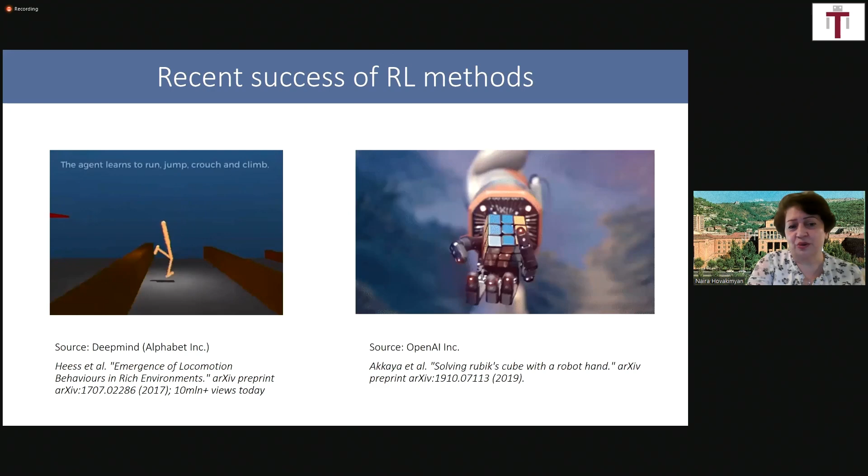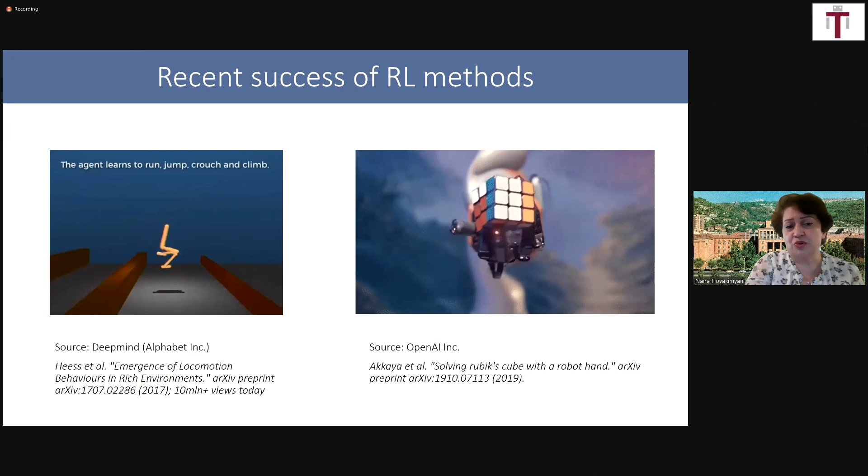Applications of reinforcement learning methods have created great impact across not just our community, but widely across the globe, like the animation on the left from DeepMind. I checked today, it has more than 10 million views. It basically shows how the agent learns to run, jump, climb without having any prior model. It learns from its own mistakes, collects data, fails again, collects data, learns, has a reward function which keeps it moving forward, and so on. On the right, you see the Rubik's cube that I'm sure many of us have played with in our young days. So it can be today reconfigured with a robotic arm.

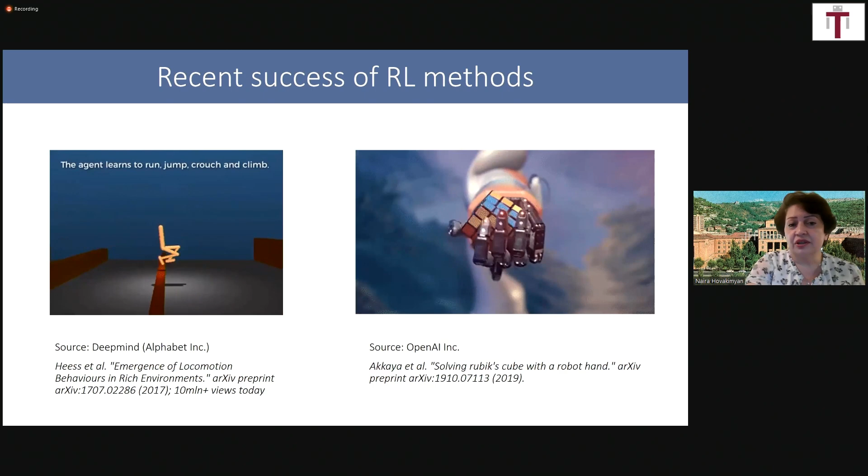While these applications seem very impressive and show what artificial intelligence methods or machine learning methods can achieve from having data and learning methods, obviously we cannot afford having these methods on safety critical systems. Safety critical systems will not forgive mistakes. We cannot allow failing, collecting data, trying, learning, failing. So every crash here can be catastrophic. Human deaths are not allowed. Accidents can be very expensive.

And we have experience here of flying the Learjet. We are not just talking artificially here. The airplane on the left, you will see through this presentation numerous times. The drone here is a picture taken in our lab. On the right, we have the Waymo car. My student is working at the company. So these safety critical applications can punish us severely if we afford playing with them, assuming that we can have a mistake, collect the data, learn on the go.

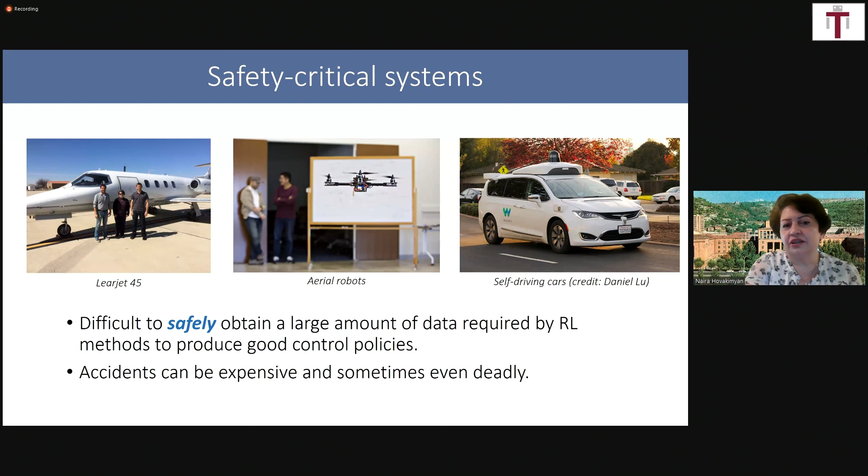So let's look at what's happening in a typical setup when we try to collect the data and use an optimized controller like that. Typically, we have a model learning block that learns the model from the data. There is an optimization that produces a controller, and the controller drives the system. So what can happen is that external disturbances or modeling errors can basically destabilize the system.

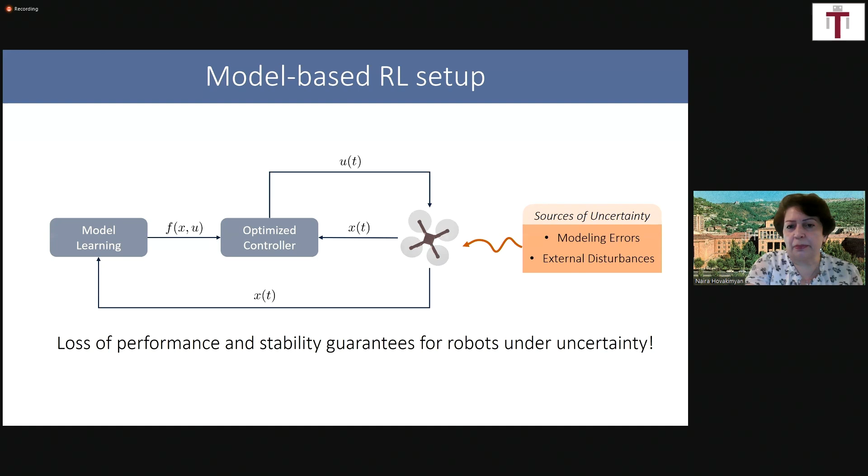What one needs to understand is that safety must be built into the control architecture from the beginning, by design. This means we need an augmentation with a safety controller that ensures the safety of the system throughout the learning process. No matter what mistakes, errors, or data collection issues occur during learning, safety must always be there, so that every new piece of knowledge acquired, subject to errors and failures, will not destabilize the system.

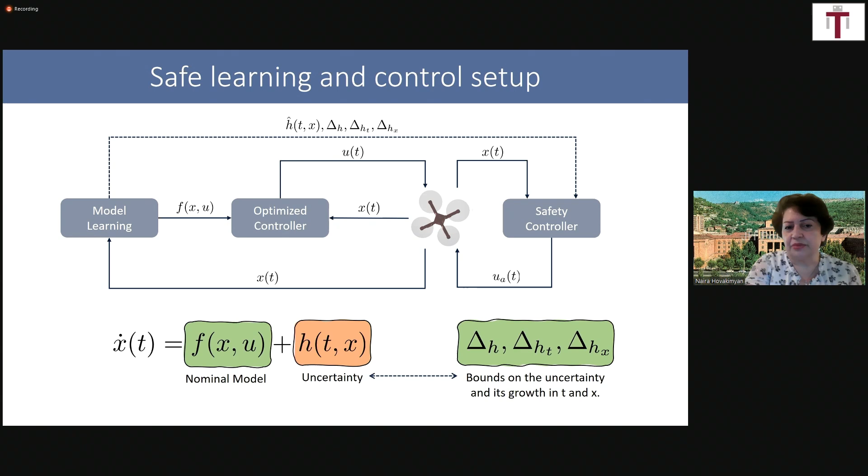Looking through this type of development, what do we need from the safety controller? We need typically certificates of performance and robustness, which include transient performance, steady state performance, time delay margins, and disturbance rejection—something we learn in a junior level control class, like the alphabet of control technology.

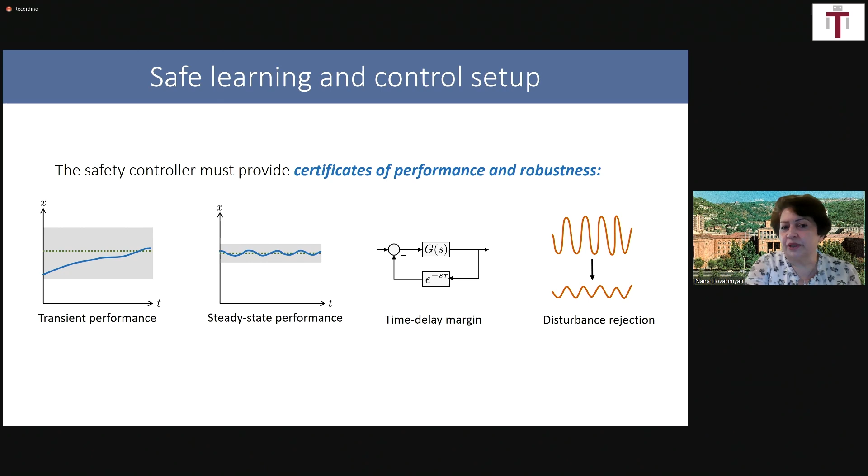The L1 adaptive control architecture that we developed over the last 15 years has proven its worth already on a variety of big platforms. I'll show some flights of the Learjet. We have commercialized it for Evolution autopilots of Raymarine, for some drone technology. It went into hydraulic pumps of Caterpillar. We have tests at Statoil on drone technology of IntelinAir and many other industrial applications.

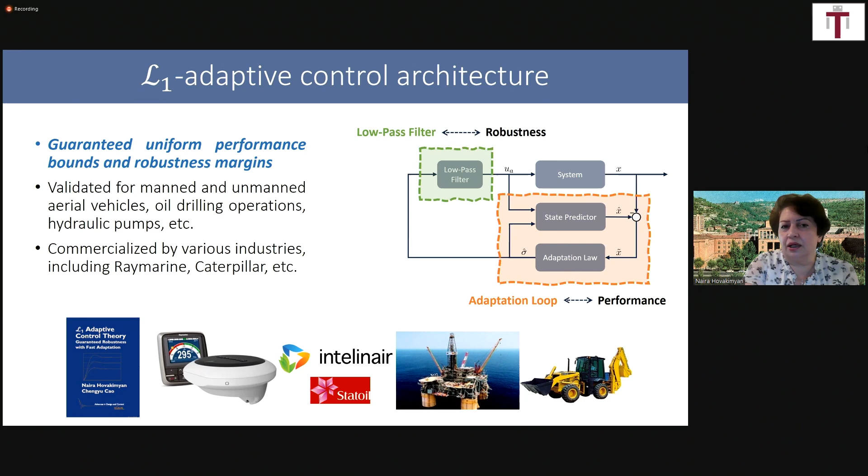It has an architecture in which the estimation loop is decoupled from the control loop, so we are able to tune for performance and robustness in a very systematic way, and be able to quantify its robustness and performance margins and its performance bounds a priori, and be able to remain in hold of those throughout its performance.

So when we augment the L1 adaptive controller with a type of model learning controller that I described, what we are able to do is retain the key features of performance and robustness of L1 adaptive controllers, yet at the same time benefit from the versatility offered by these machine learning methods. This is what we will explore through this presentation, and this is what makes up most of our current research program at Illinois these days.

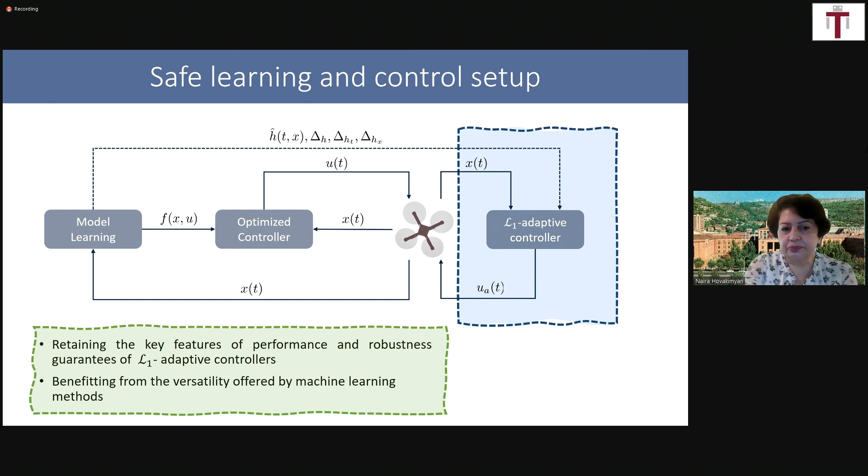L1 adaptive control theory provides decoupling between estimation and control, and helps us establish the type of performance bounds shown here. There is a desired system trajectory that one would like to follow. There is a reference system, which is a hypothetical reference system. It's non-implementable, but it describes the best type of performance one would achieve with L1 adaptive controller if the system uncertainties were known.

Between this reference system and the actual system, the performance can be quantified as inverse proportional to the square root of the adaptation rate, while the performance of this reference system with respect to the desired system can be quantified proportional to the filter bandwidth, augmented with an error that decays exponentially, dependent upon the initialization error.

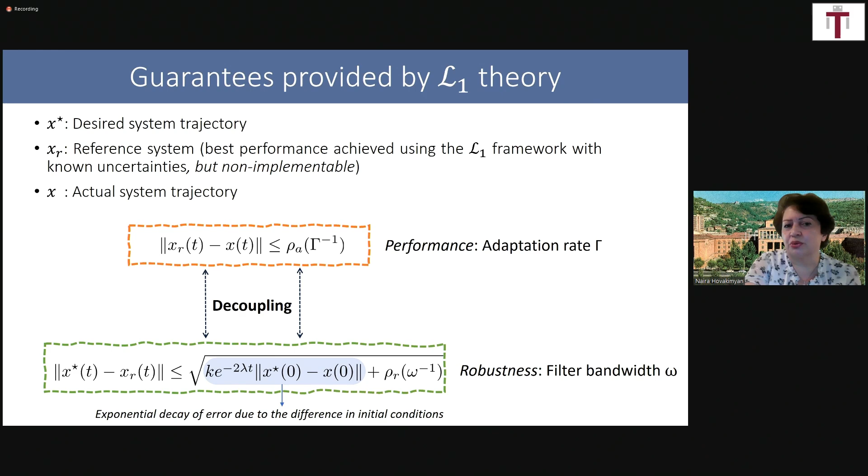With this decoupling, we are able to tune the performance and robustness of the system in a systematic way. It is this architectural versatility of the L1 adaptive controller that helped us achieve quick tuning across different applications in different industries, and to achieve transition to different industrial platforms.

Here is a timeline of how our development went. The first papers appeared back in 2006 at the American Control Conference, and in the same year at the AIAA Guidance Navigation Control Conference. We had our first flight tests with the Naval Postgraduate School on their Rascal UAVs with Piccolo autopilot, doing augmentation of their outer loop to fly aggressive path-following trajectories.

Later in 2007, we got NASA grants to fly their Airstar subscale commercial jet. We were able to successfully put the airplane into stall and post-stall conditions, giving the pilot smooth recovery opportunities. That led to joint publication opportunities with Boeing, Raytheon, and other co-authors, giving lots of visibility and opportunities to write papers with other companies.

That's where we got collaborations with Statoil, Raymarine, Caterpillar, Eurocopter, MBDA, and Seagate. All these companies got attracted to the technology, and there were lots of transition opportunities.

Then we got the opportunity to also test on real airplanes. While NASA was testing it on a 5.5% subscale commercial airplane, the Learjet and F-16 were already real airplanes, with pilots inside, that we were able to fly in 2015, 2016, and 2018. And now, with the explosion of machine learning methods and the robotics industry, we were able to take this framework of safe learning and control and move into robotics applications.

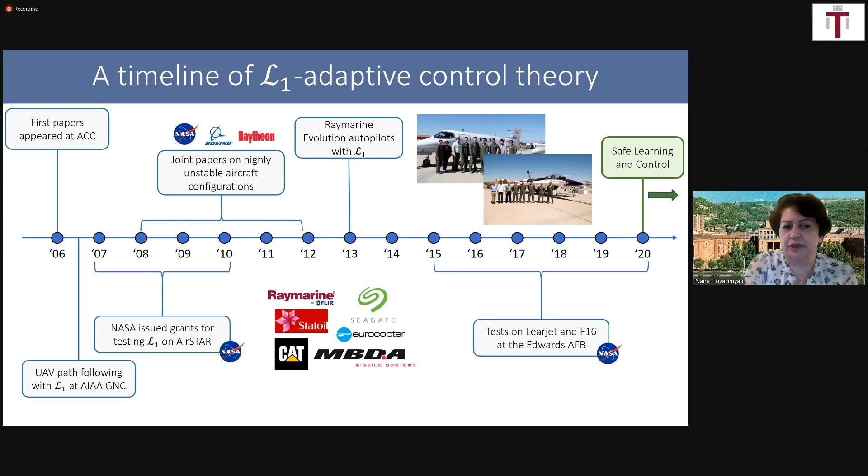Before I go on to show what we do with safe learning and control for robotics, I want to show some of these flight tests of the Learjet, because these are very interesting and will keep everybody entertained somehow. With the Learjet, when we go to fly it, we basically have pilots and flight test engineers.

The Learjet is a CalSpan vehicle with a variable stability system configuration, where they can inject accidental configurations that they design with us carefully to validate the robustness margins we claim theoretically. They're able, with their safety switches, to take over in case our theoretical claims don't get verified, so they can save the aircraft.

That's why they take the risk to fly into these configurations. So in the next movie I'll show, they are going to test for handling qualities, flying qualities. When you fly the airplane in normal configuration with no fasten seatbelt sign, that's flying qualities level 1. When you have turbulence and the fasten seatbelt sign, that's already degradation, flying qualities level 2, and so on.

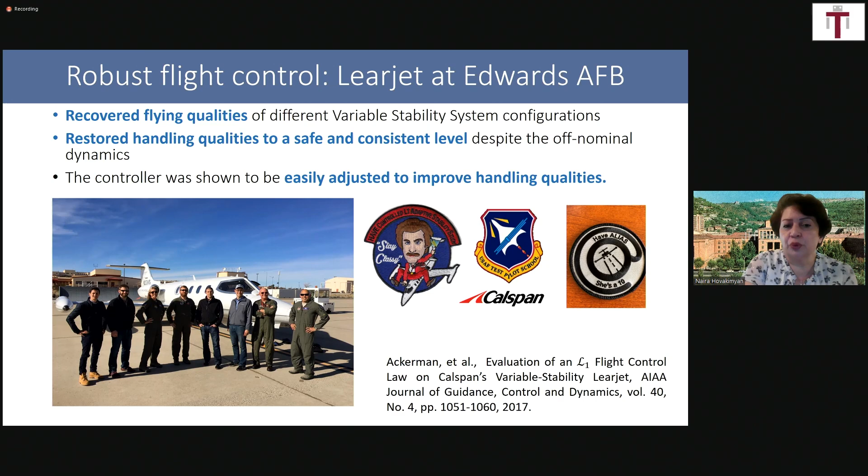The pilots are put into a configuration when it's very shaky, and they have the Cooper-Harper rating scale in their hands, where they have to read and assess whether it's flying qualities level 1, 2, or 3, and from which configuration, how much they recover. Because the situation is very shaky, they're not able to read from the piece of paper, so they ask for L1 to come on so the airplane can be stabilized and they can read in which configuration they are and how much they recover.

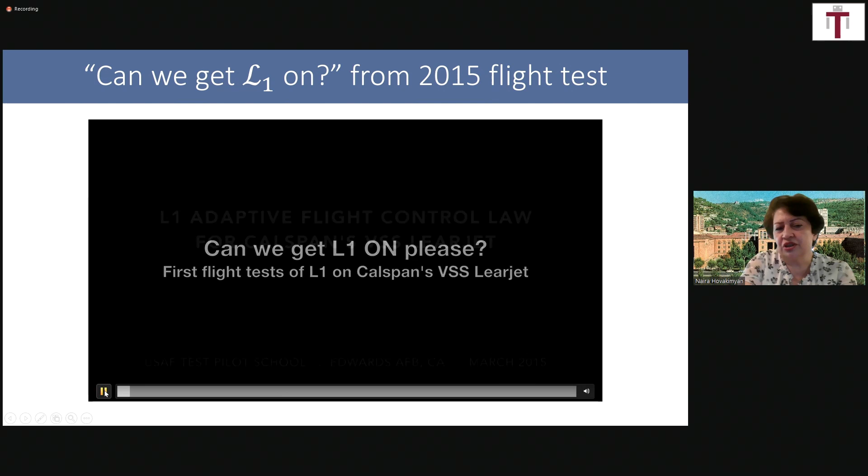So just listen. I gave a little preview so that when you listen, you manage to catch up, because it goes pretty fast. It's shaky, it's accidental, so it goes a bit fast. That's why I gave the preview.

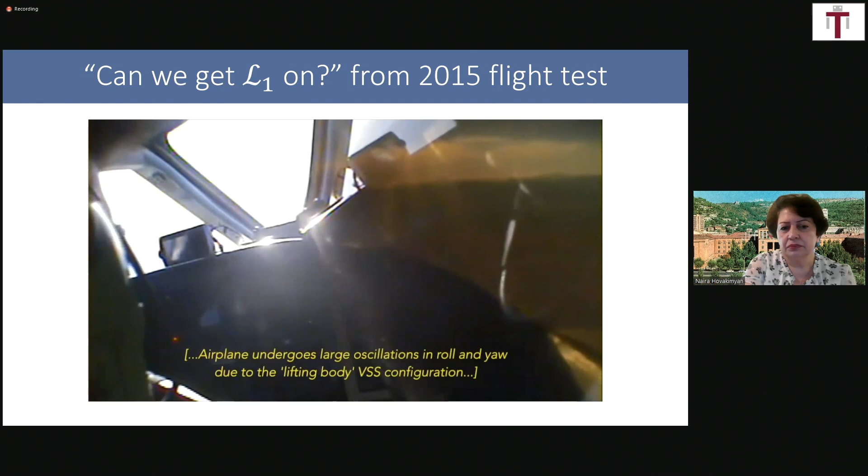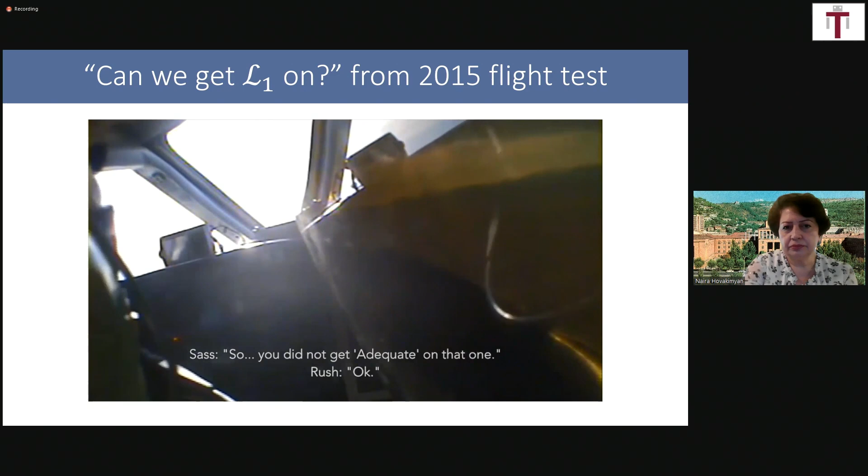Constantly overshooting my desired bank, though. Jason's probably hating life right now. Yep, you're right around 27. I'd recommend you just do the task with L1 on and don't do both tracks. Got it, all right, so you did not get adequate on that one? Okay, so if you want to run through a CHR real quick, you did not get adequate. So we're starting in... can I get L1 on as we do the scoring, please? Yep, there's your answer, there's your answer, right? All right, L1's coming on in 3, 2, 1. Now L1 is on, thank you. Rush, if you didn't ask, I was gonna.

And now it's a landing scenario, basically. Landing is very challenging. For example, NASA never decided to land with L1, but with Learjet, they agreed to land with, again, some type of abnormal condition.

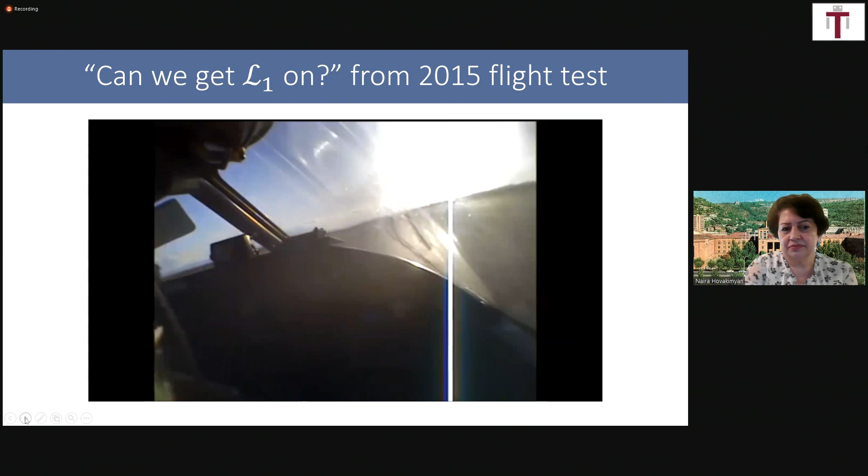200 feet, copy. 100 feet. 50 feet, shallow, looking good. There's a ground effect, you see that? Yep. It's uneventful to me, very uneventful.

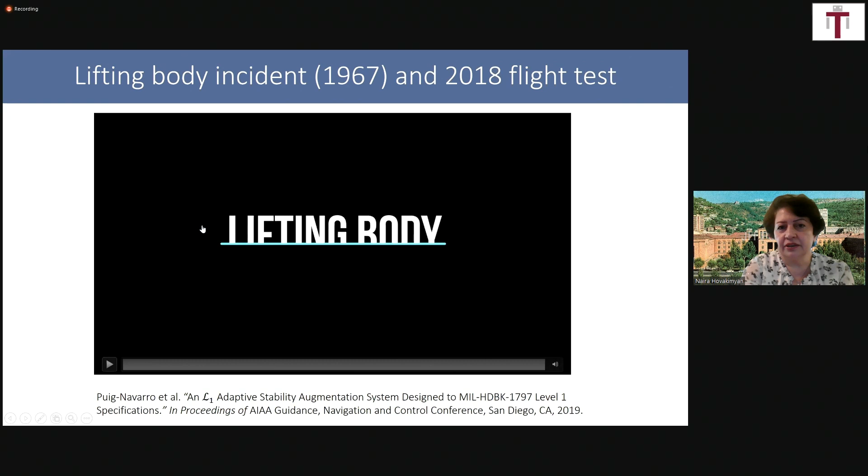So this was the 2015 deployment, upon which in 2016 we got the F-16, which we unfortunately cannot show and talk about because that's F-16. In 2018 we got the Learjet again, and here they implemented an accident from 1967, which is a lifting body incident when the aircraft goes into a roll spiral mode configuration.

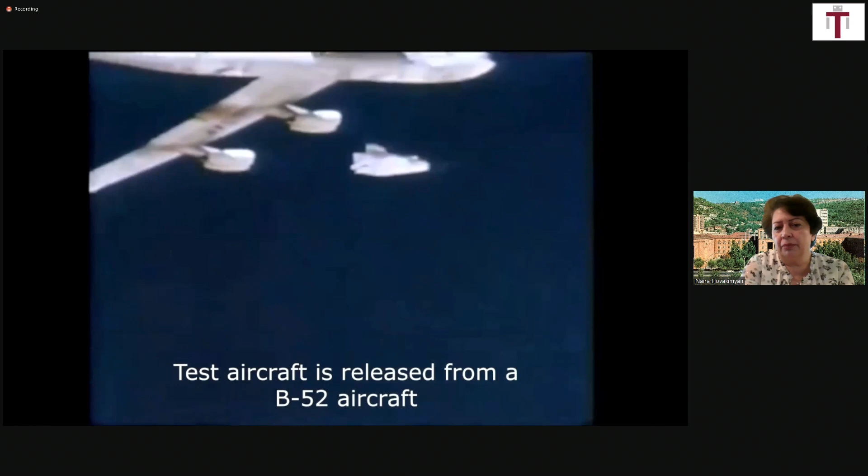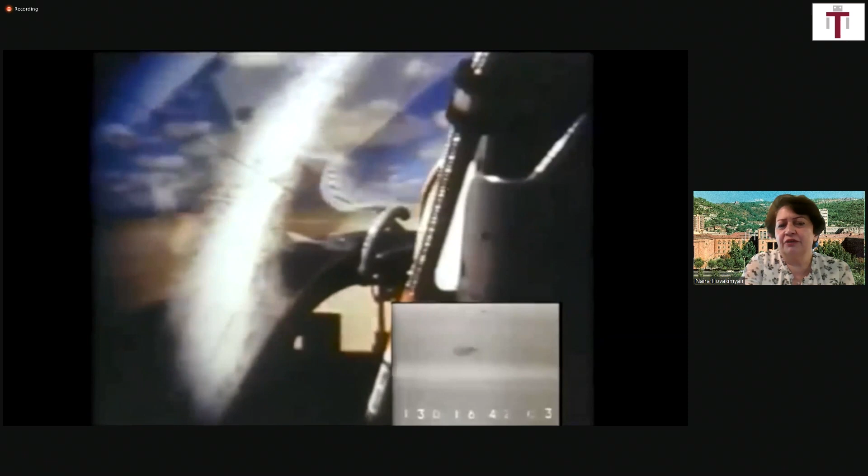In this 1967 accident, luckily the pilot survived. They have the test data from this accident, which they are able to inject into the Learjet and test it. These tests are extremely valuable and precious in some sense for training the pilots and students. This experience is extremely invaluable for everybody involved in this process. Now just listen to the recordings.

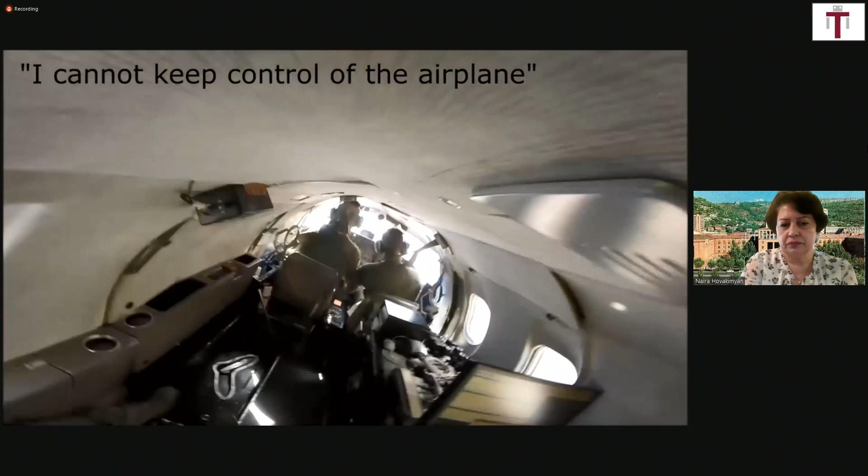I cannot keep control of the airplane. You have the airplane? The student on the left is my student, sitting there, Javier.

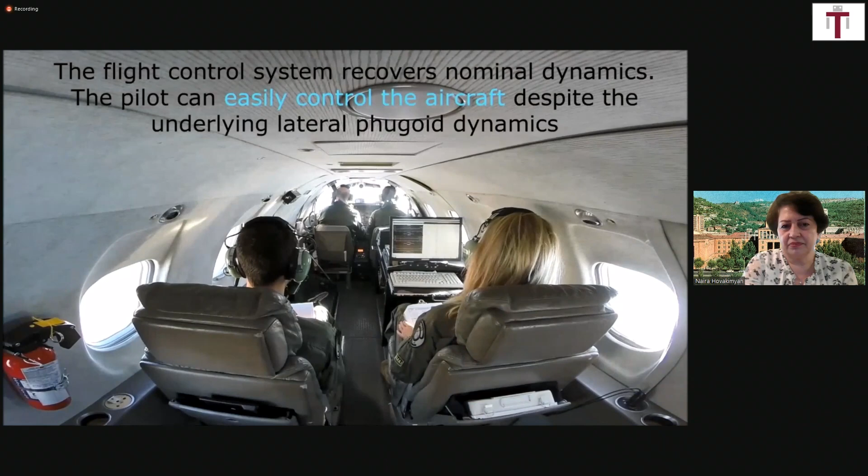Hey, task in 3, 2, 1, now. So you can feel there, in high frequency, I made some high frequency inputs, excited the roll. Lower frequency, the roll overshoot or oscillation tendency is less. Sounds good, there's still some there. Pitch, I'm having no issues. Fine tracking and gross tracking are very good in pitch. All right, and I have maneuver complete.

Now they go into engine out test.

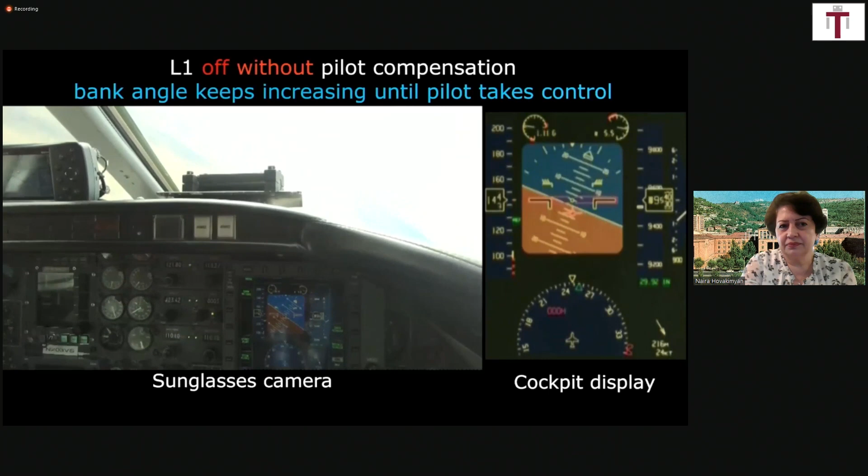All right, recording on in ready, hack. Running, okay, power's coming back. My hands are free, 3, 2, 1, now. Controls fixed, and recover please. Okay, and recovering. Power's back.

I'm ready to try this now with a pilot correcting for it. Okay, I'll give it about 1 second of reaction time. I am on conditions. All right, and then recording on my call. Ready, hack. On. Okay, power, it'll be left throttle. In 3, 2, 1, now. 1 potato and recovering. And recording off, okay, recording off, matching throttles.

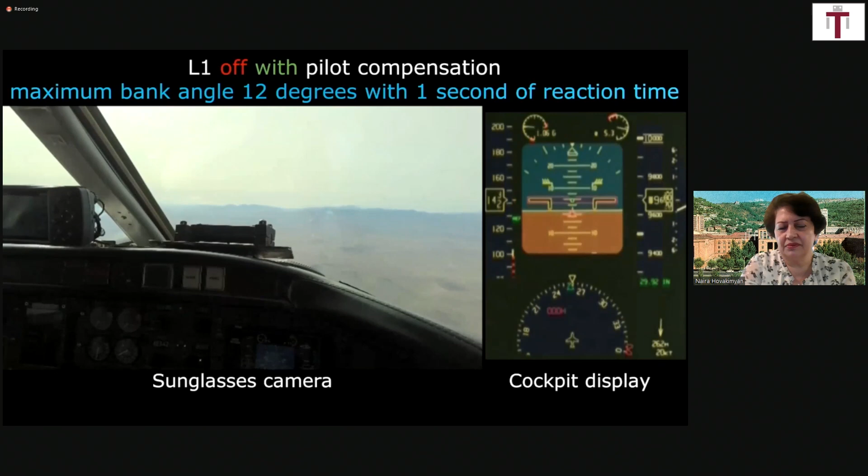And with L1, they come to 3-degree degradation only.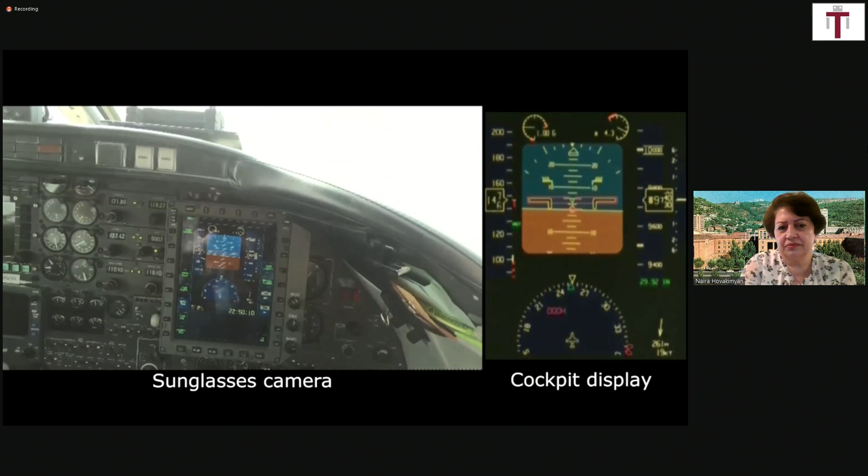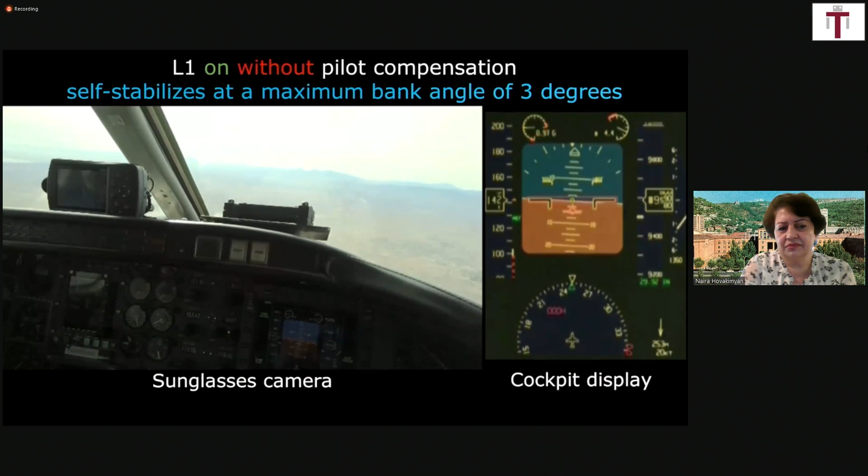I'm not touching the controls. Nice demonstration, check that out. About 3 degrees of left bank. Speeding in the rudder to match. I can feel that, it is descending a little bit, but that would be easy to compensate for. I think you got some good data there. All right, recording off, matching power, recording's coming off.

So this is what I tell the students, that in real world, there is no zero, right? 3 degrees, pretty good. After what we saw with 20 degrees without pilot, with pilot it was 12 degrees. With L1 without any pilot, it was 3 degrees. So 0 is just an artificial number, right? It's making all the math work. So 3 degrees in the real world is a pretty good achievement.

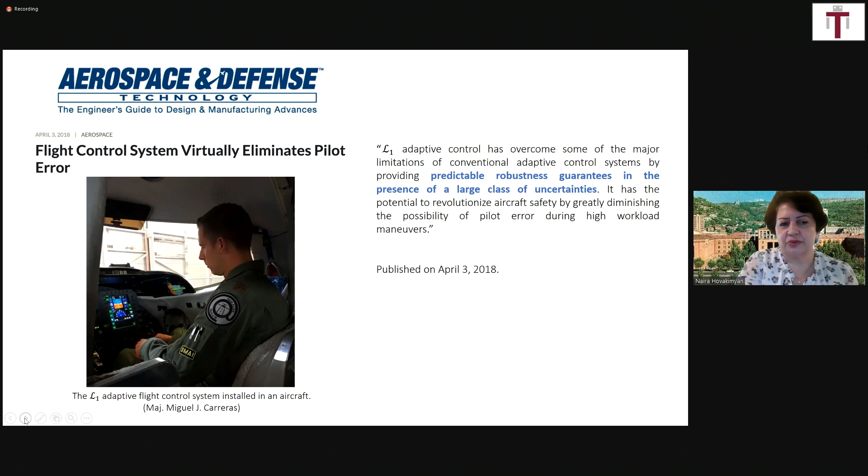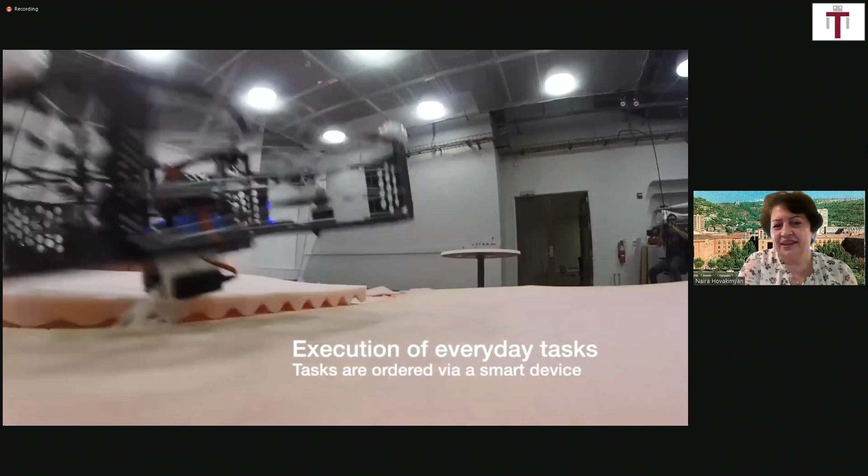And we got some press, obviously, from it. So having these demonstrations, naturally, the next thing was coming already historically into our life, were the robotics applications. So the first robotics application we got, it was interesting, with this elderly care grant from NSF that got us also some press into New York Times. It's interesting that this was kind of the first opportunity that brought us, and it nicely rings a bell with a funny cartoon that would now come and entertain everybody.

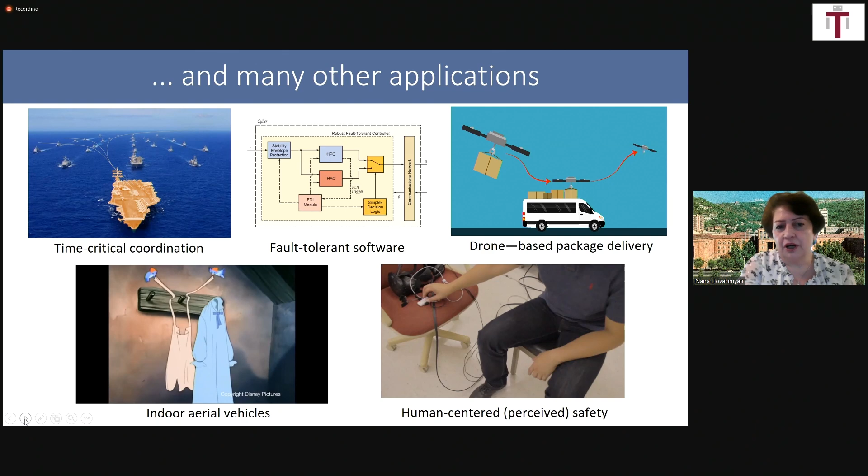So deploying these drones at home environment was interesting because we could kind of bring in VR technology and study people's perception of it and kind of compare it to Cinderella, that was maybe filmed a few decades ago, and ask questions how safe she feels in the presence of birds showering her or helping her with household tasks like setting up her bed or something, because this brings up lots of interdisciplinary research, how people feel safe in the presence of these robots, because now we talk about package delivery tasks. So all these interdisciplinary research problems make our life very interesting, very rich, and the questions that we can ask and train our students become very important and far-reaching with their applications.

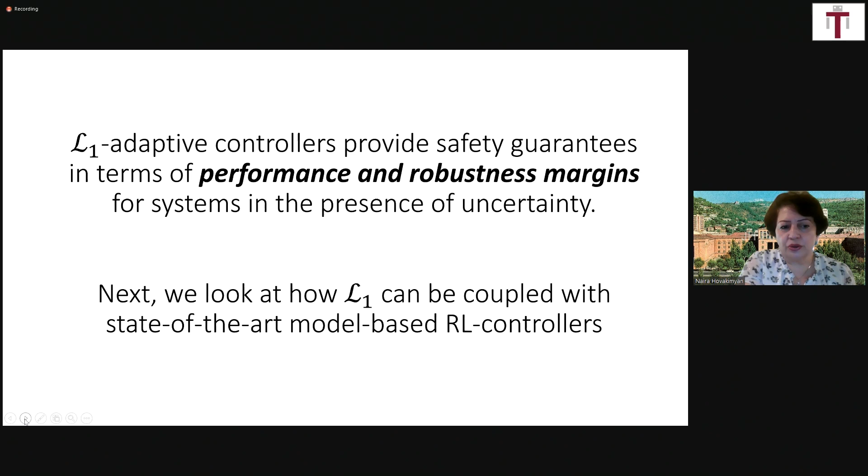So as I said, for this seminar series, I wanted just to pack a number of problems where we look at how to do safe learning and control simultaneously. So the first problem that I want to show here is what we did in collaboration with Evangelos Theodorou from Georgia Tech. We integrated L1 adaptive controller with his model predictive path integral controller that provides a framework for solving nonlinear model predictive controls with complex constraints in near real time.

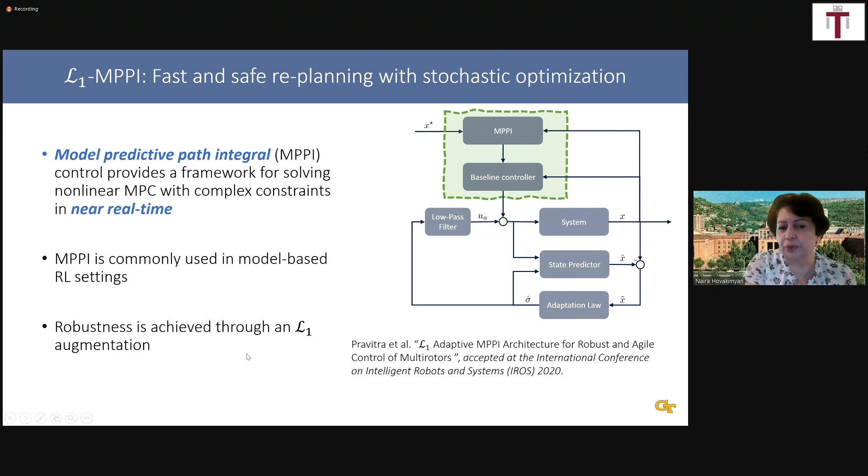So we integrated an architecture here and used it in his Alpha Pilot project environment. Here is the environment that I want to show. The paper is accepted in this year's IROS conference. Let me run the movie here and explain what's happening here.

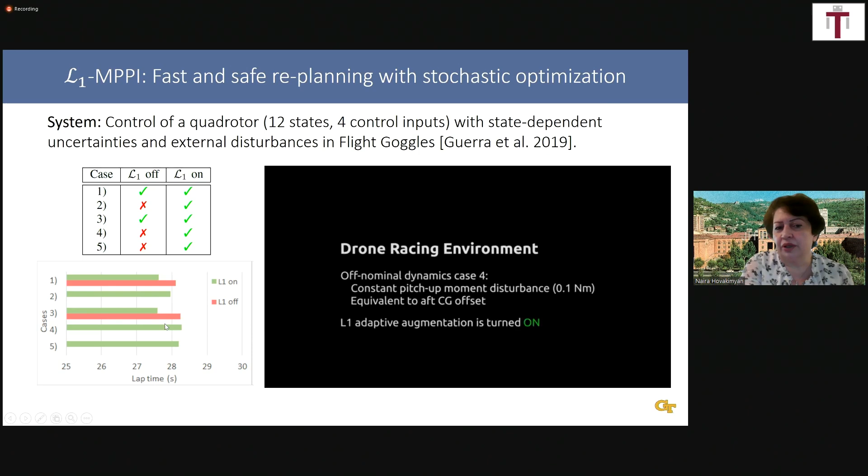So what you see here in red is when they run the Alpha Pilot just with MPPI, basically it takes them this long time-wise to finish the lap. When they add the L1 on top of it, they finish the lap in a much faster time. And the green segment just shows that in these cases, the MPPI didn't survive without L1. And with L1, they were able to take these few other cases as well. So here is that drone racing environment.

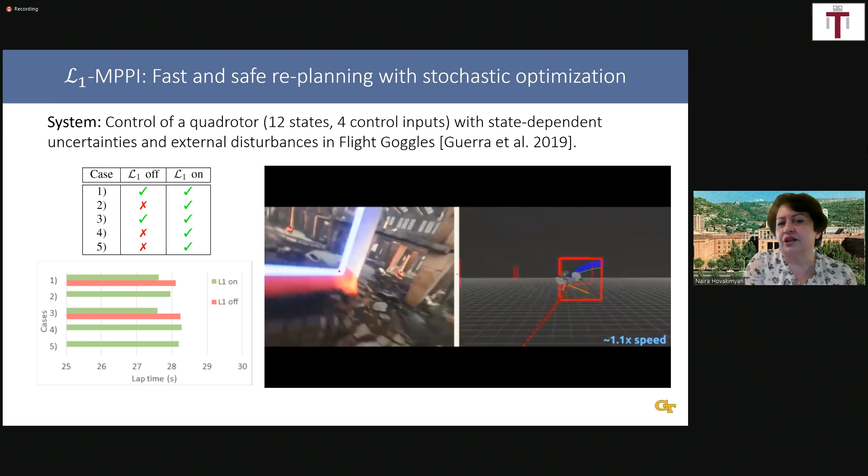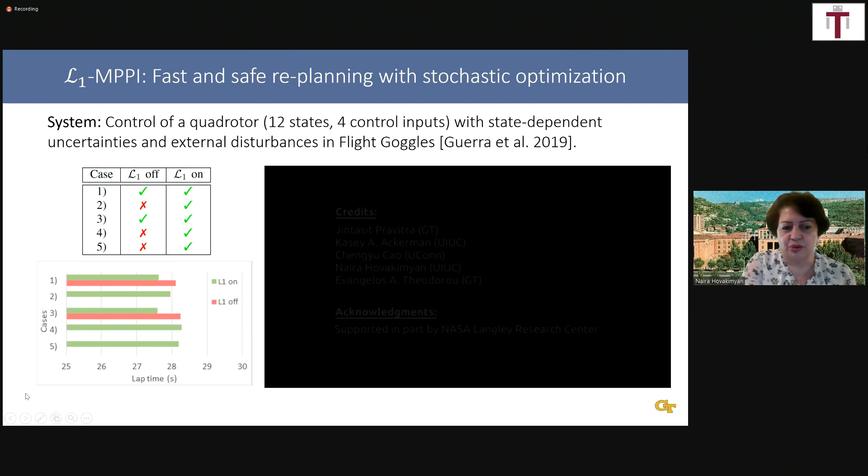And now as we are talking actually, and Georgia Tech has reopened their campus on June 18, the students are working to fly this L1 MPPI architecture on a real drone in their Vicon environment. Just the campus opening was happening slow. We didn't get the real drone footage from their lab. Otherwise, most likely we would have had today the real drone footage and not just the Flight Goggles environment. But we are very excited by this work with Evangelos, and hopefully we will have the real drones flying very soon. If not for this pandemic, we would have had it for sure.

Similarly, we have integrated also again with Evangelos this L1 with differential dynamic programming and model learning. So basically, the model learner continuously improves the knowledge of the model. Based on that, the trajectory optimization does a better optimization. And in that process, as the model learning and the trajectory optimization improve, L1 ensures this safe control and safe guaranteed performance without losing the robustness and so on.

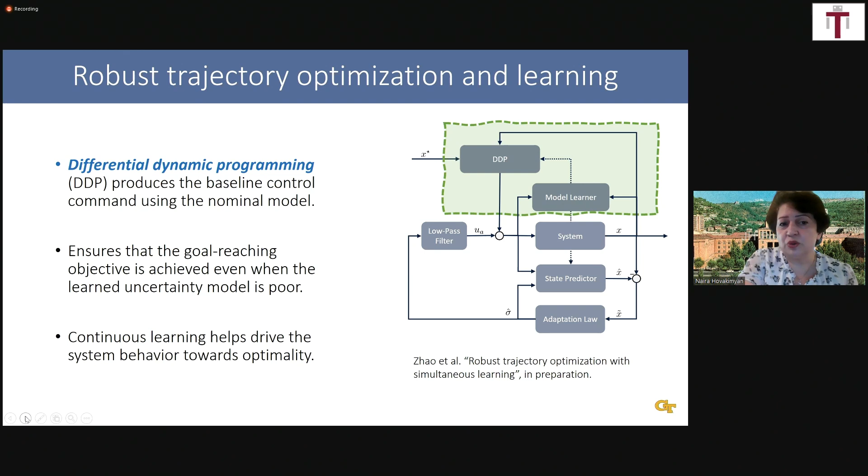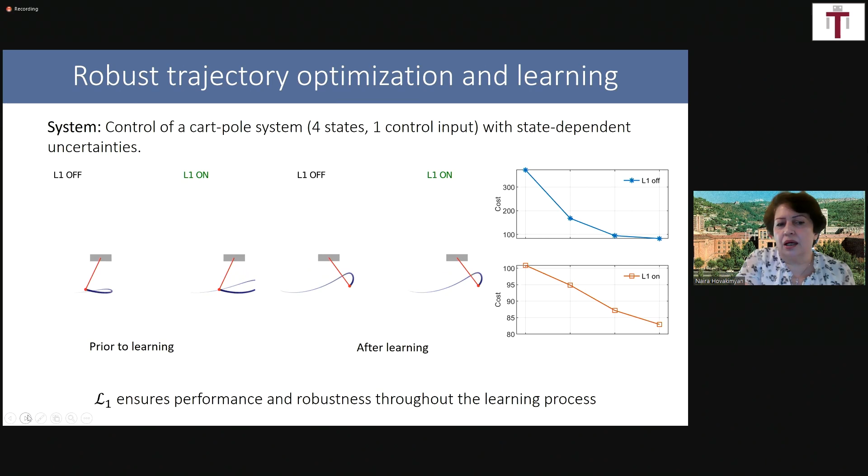Moving forward, we want to show, for example, if Gaussian processes could be safely integrated with L1 architecture. Why do we do that? If data is being accumulated, can we simultaneously use this accumulated data to learn the model without any persistently exciting signals? Gaussian processes say the Bayesian learner can learn the model with a few data points. If we store them in the kernel matrix, can we learn it, and use this learned model for better planning purposes without any prior knowledge?

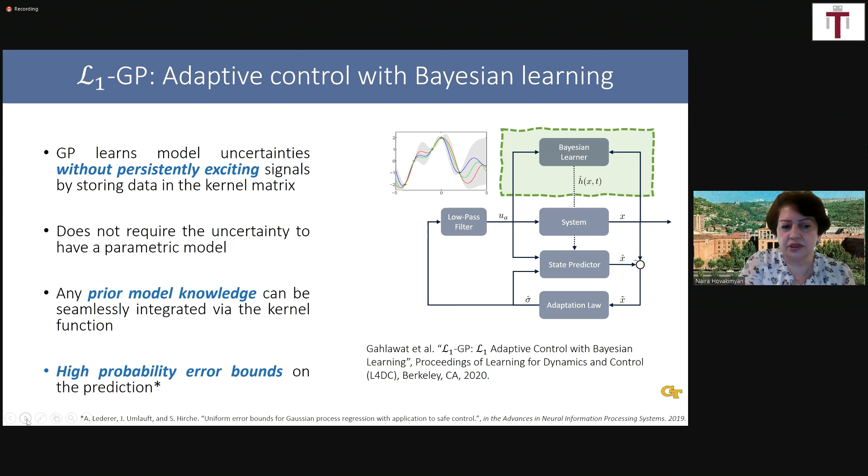This paper was published and presented recently at the L4DC conference, which we lost our opportunity to travel to. We simulated it for a quadrotor model.

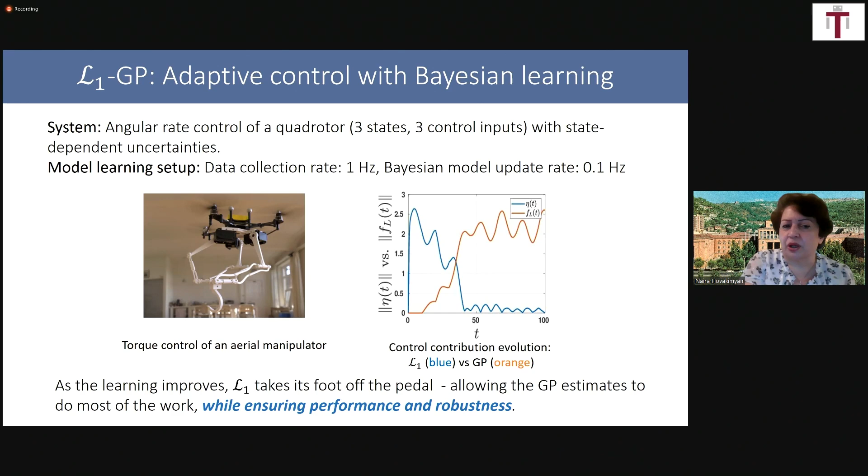Inside your system, you can use it for better planning or other purposes your mission may require. For example, in the middle you can have change of mass, center of gravity, and other disturbances like package delivery. What this implies is that L1 will kick in again to pick up the uncertainty and compensate for it until the learner again picks up enough data to learn and compensate. Once the learner picks up enough data, the L1 contribution will die out again. This is a benefit of the architecture.

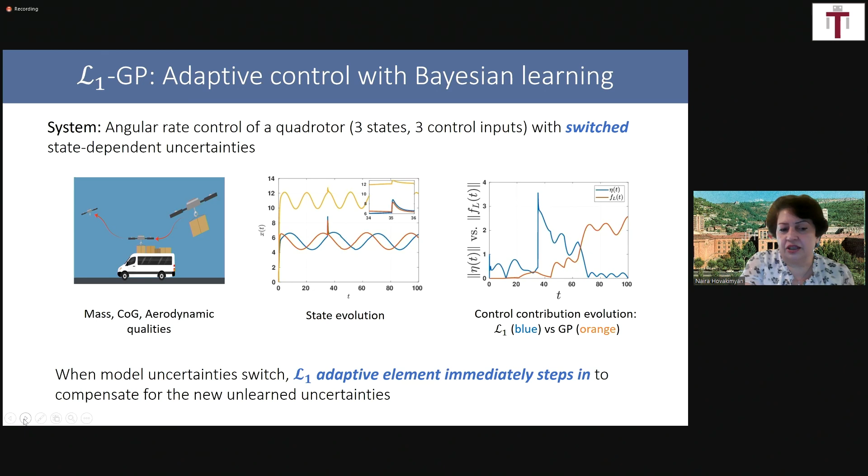So the question is how to synthesize an architecture that works so that when you don't have enough data, L1 works, and the minute you have enough data, the learner takes over and L1 goes into passive mode. This is the benefit of that architecture, detailed in that L4DC paper that can be downloaded and studied. Next, I want to talk about navigating robots in confined spaces between different obstacles, and how to build safety tubes around those.

This is relevant to our work with Marco - we have a project, again, from NRI with Marco. We use contraction theory here. Imagine we have a nonlinear system with modeling uncertainties. We have safety-critical applications, and we want a planner-agnostic approach to certify safe tubes around desired trajectories, so that the robot remains inside these safe tubes and navigates between obstacles.

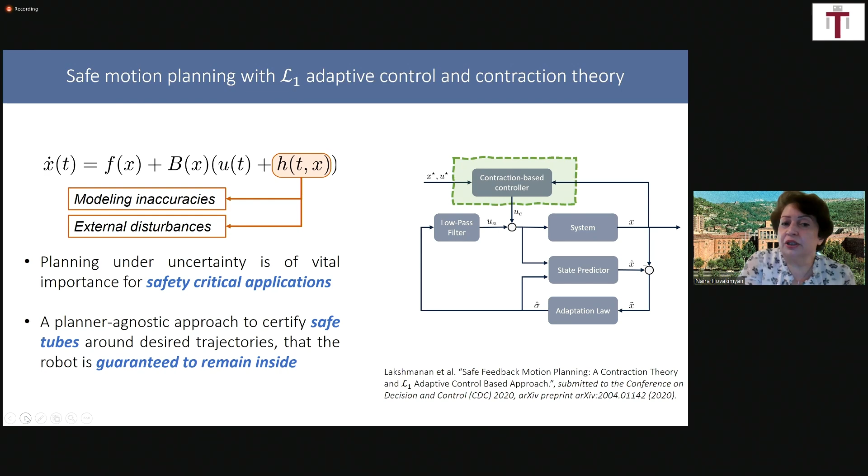This paper has been submitted to CDC and can be downloaded from arXiv. We designed a contraction-based controller that keeps the robot inside these safe tubes, augmented with an L1 adaptive controller that gives us multiple knobs for tuning between safety, performance, and robustness.

Here are multiple obstacles, and say we want the robot to follow this orange path that would be safe in between these obstacles, but the blue path would run into an obstacle. If we design a tube like this orange one and it's not sufficiently conservative, it would run into these obstacles. Obviously we'd like it to be tighter around the desired path so it doesn't run into them.

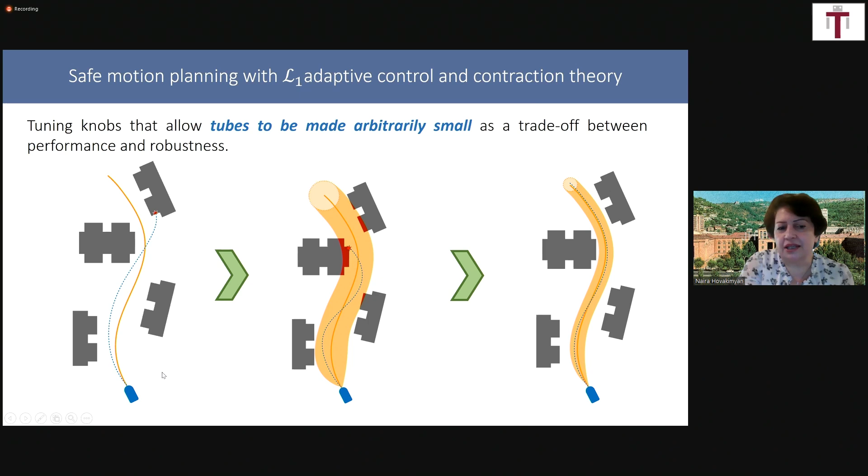What contraction theory does is look into this Riemannian energy as a control Lyapunov function and try to minimize gamma, which is the geodesic path between the desired path and the actual path, by using the Lyapunov function as the energy of the shortest path on the manifold.

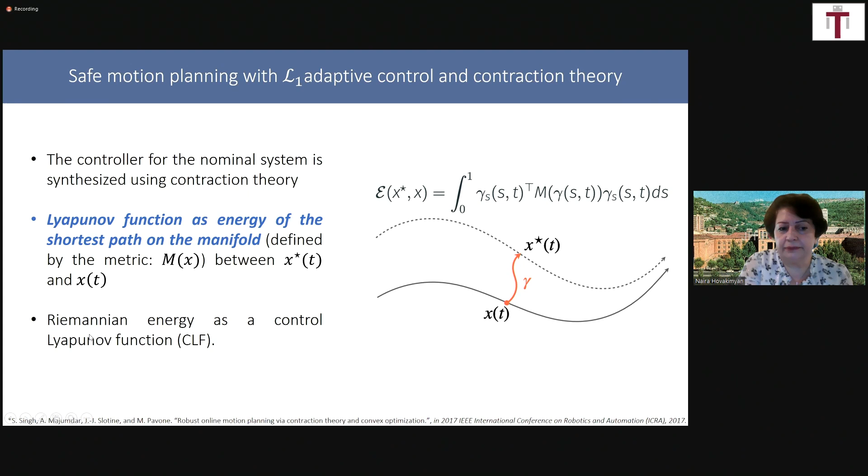We augmented this with an L1 adaptive controller, and due to the architecture of this L1 adaptive controller having this natural inherent decoupling between performance and robustness, we have three tubes now inserted one into another. The first tube is purely due to the initialization error - like a funnel, an exponentially decaying performance due to initialization error. The second tube, the green one, is tunable based on the filter bandwidth. The last tube, the orange one, is tunable based on the adaptation rate.

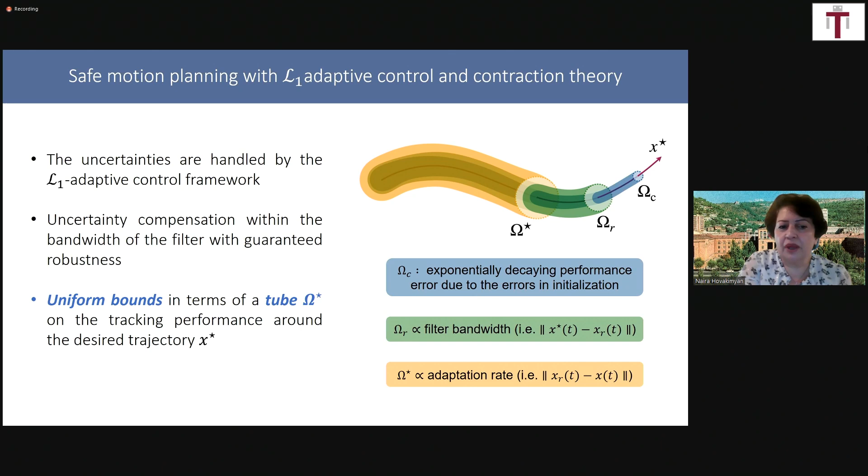Here is a toy example where we can simulate and show these effects. Having the three tubes inserted one into another, if we increase the adaptation rate, the orange and green tubes will collapse, and when we increase the bandwidth, we'll make the tubes narrow and get closer to the desired path. Here is just the contraction controller shown with the blue line that may collide with the obstacle, but when we add the L1 and tune it tighter, we can get closer to the desired path through appropriate tuning.

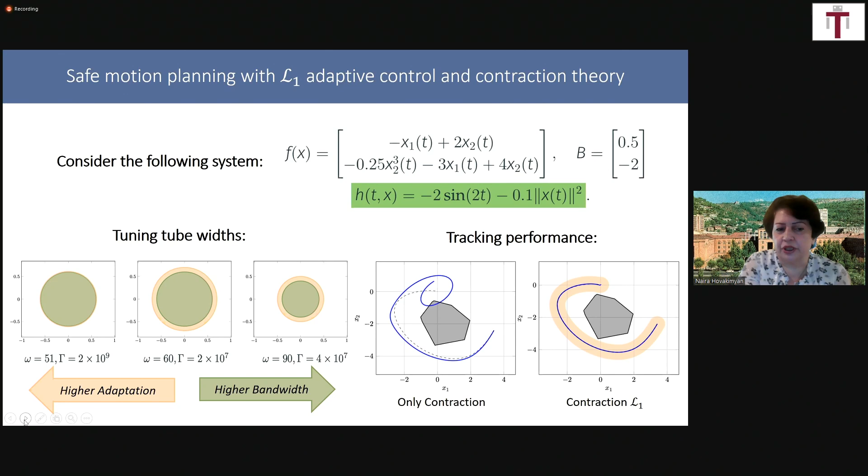What this framework allows us, as I showed, is that we can incorporate Gaussian processes with a Bayesian learner. We use this previous architecture together with the contraction controller to learn the uncertainties for better planning. By doing so, we can make the tubes tighter around the desired path and have one more knob for tuning.

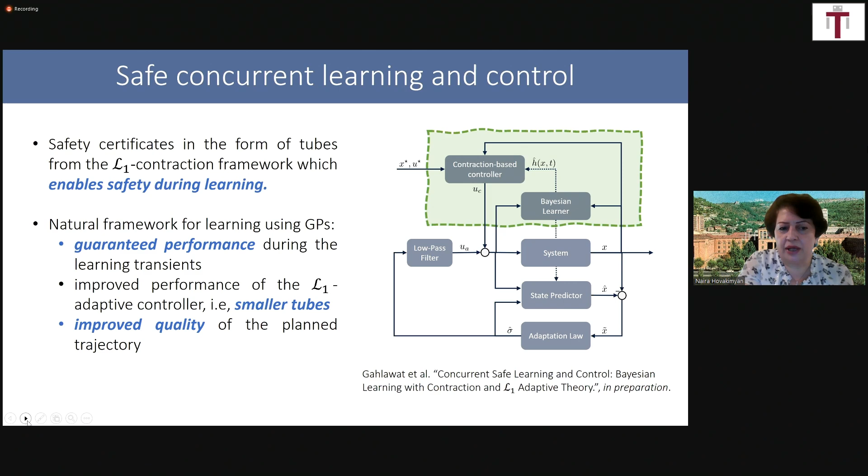This is under some mild assumptions, of course. So as we learn the model uncertainty, it will be updated, but the controllers will not be retuned. Once this paper is submitted to CoRL, everything will be downloadable, including the software, from our GitHub site.

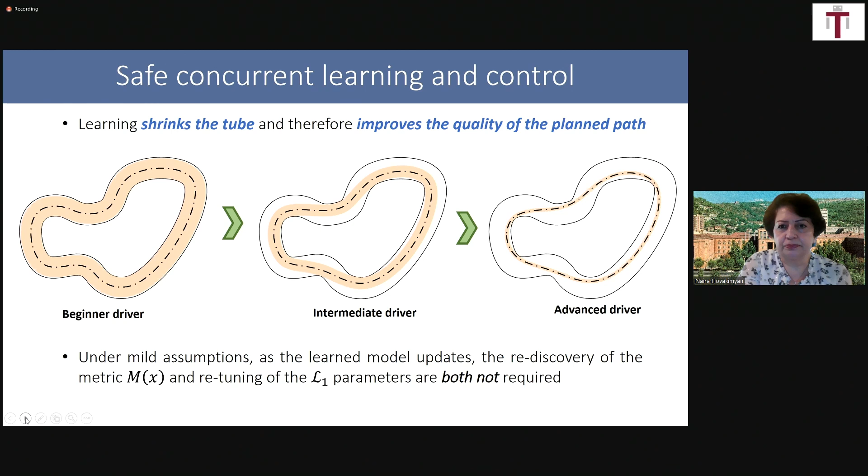Now I want to move to some of the big projects that exist in our group, where this type of controller has been motivated, and they can be used most likely over the next few years.

This is the project we're doing with Marco. This is an NRI project from NSF on last mile delivery. The underlying concept is that for last mile delivery optimization, one can take advantage of ride-sharing vehicles, dropping the packages and picking them up from these ride-sharing vehicles for the last mile delivery optimization.

That's the part of the city where you already have more stop signs, lower speed limits, and you optimize just over the random network of vehicles. Obviously, the cars have to be retrofitted with the appropriate magnetic dock, and the technology has to be there.

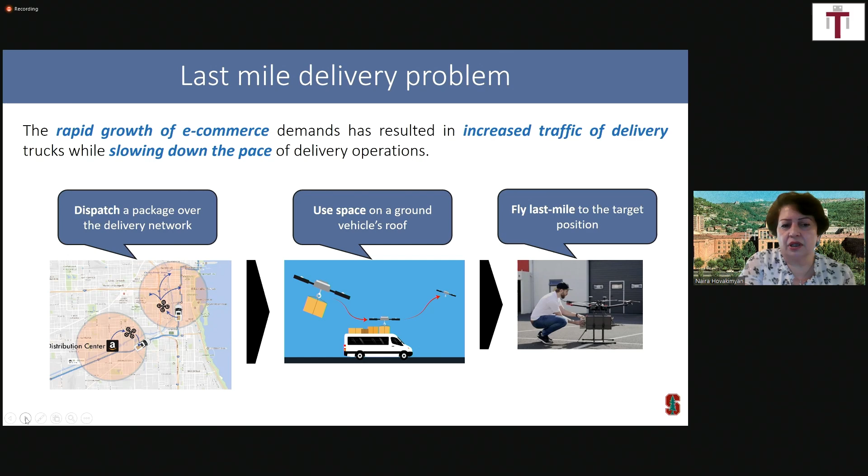Now, with the pandemic, we see more and more use of UAVs for this purpose. There are some preliminary results, both in our group and in Marco's group, that we cite here. What we show here is an animation from our group; the paper was submitted to WAFR. This animation shows a point of no return when a drone is trying to approach a vehicle for dropping the parcel.

Here we're trying to look at how to embed a deep learning type of architecture that would have computational optimization for energy savings, to maximize the flight time. We call it safe learning here.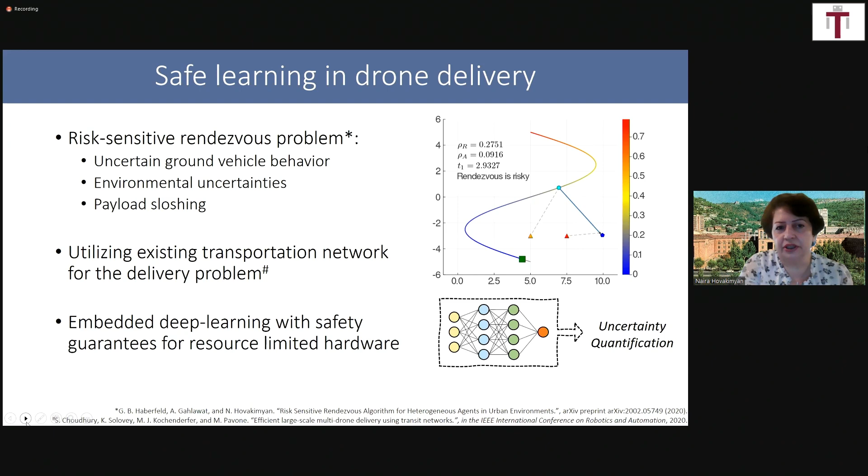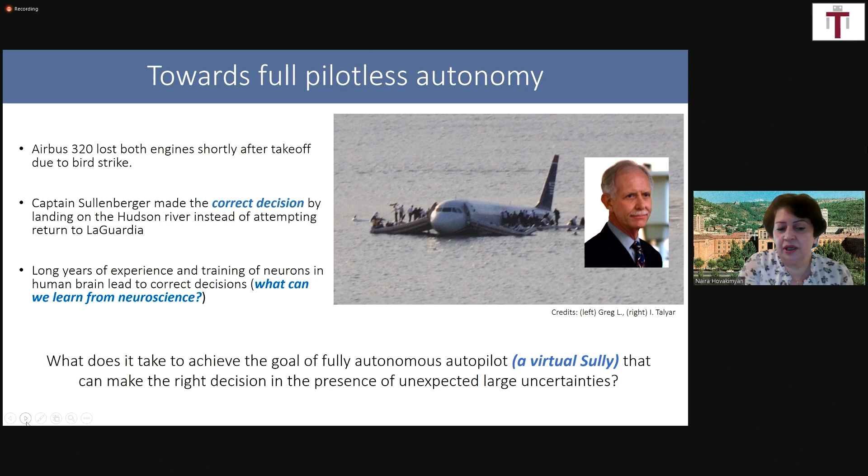Another project in our group where we're trying to use safe learning with control is related to this Virtual Sully project. All of you remember the landing of the US Airways flight in the Hudson River, and we know it was the captain's decision to land there. With his 40 years of experience, he debated his options between landing in LaGuardia, Teterboro, or the Hudson, and he took the correct decision to land in the Hudson.

It was his experience, with all the neurons trained in his brain, that led him to land in the Hudson, and that was the correct decision. So can our learning and optimization algorithms today reproduce a similar block in our autonomous systems that will take the right decisions every time?

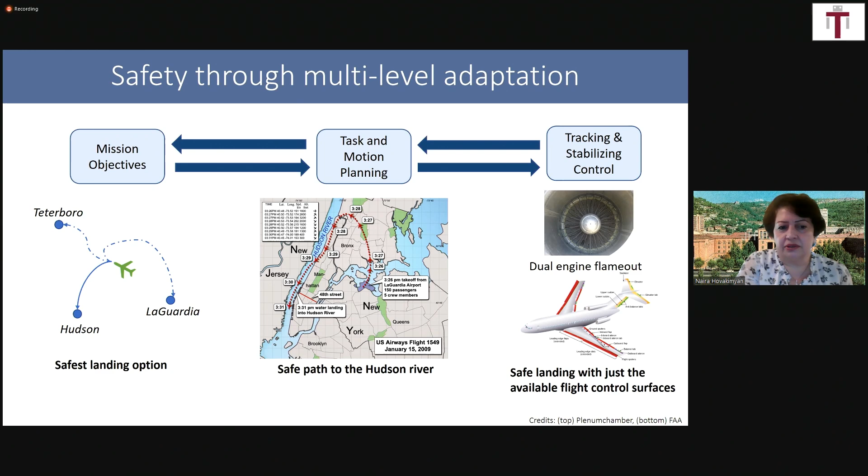We want to endow our autonomous systems with similar safe path planning and safe mission replanning objectives, so that at every moment a safe mission replanning can happen to ensure safety, save the vehicles from crashes, and execute path replanning naturally. We call this multi-level adaptation, and this is another NSF project in our lab.

Another project we're very excited about is going on with Evangelos. This has to do with resource-aware, uncertainty-aware control architecture, where we refer to computation as our budget, and we would like to understand how we should budget the computation for control, perception, and navigation.

This is very interesting, and we have another collaborator from Georgia Tech, Kira, that Evangelos works with. This work is also partially supported by NASA Langley. We have here a fast computational algorithm for collision checks that was published last year at the Robotics Science and Systems Conference.

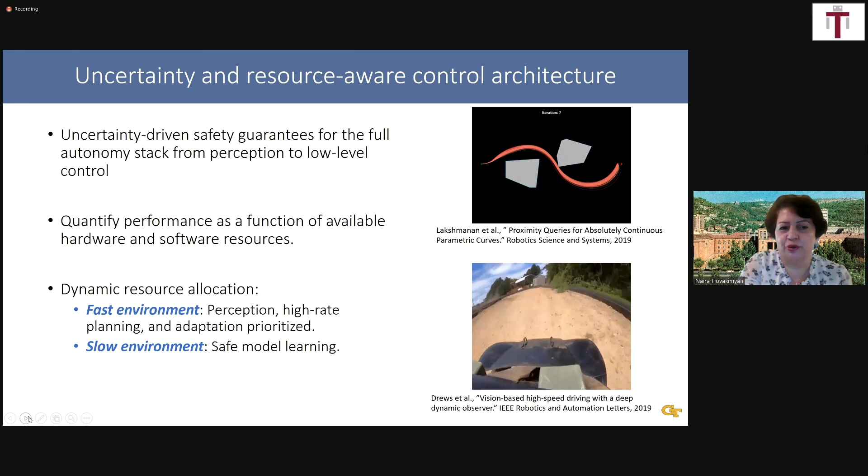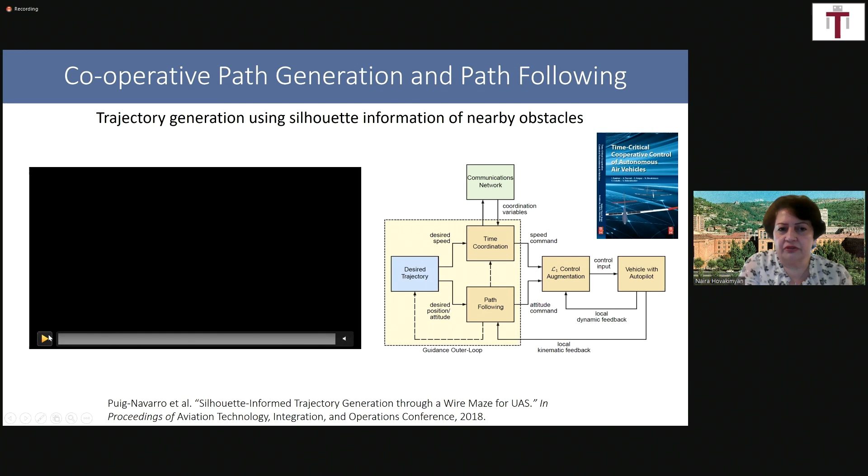All of these add to our portfolio of methods for safe learning and control. Finally, I want to give a brief overview of the cooperative path generation and path following framework that we developed in our lab for long years. This work was funded by Air Force and NASA, where through decoupling of path generation and path following, we have enabled multi-vehicle missions.

We have implemented it in NASA in a very challenging environment in NASA's Langley Autonomy Incubator. Let's go through this, how 2 drones can fly. They have network dropouts, and they don't have the model of the maze, but they still do silhouette-informed trajectory shaping as these 2 drones go through this maze, and they coordinate with each other to achieve simultaneous landing.

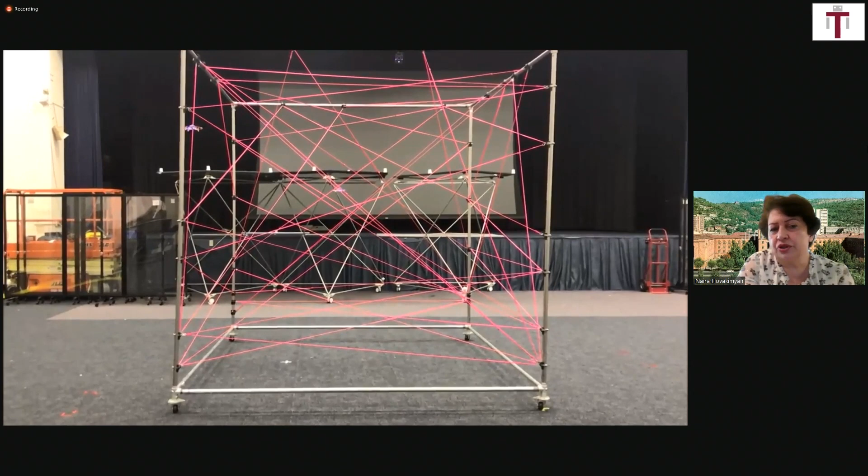So this is a time-critical mission where they coordinate with each other their arrival time. They exchange their relative error positions, and they coordinate on their arrival time.

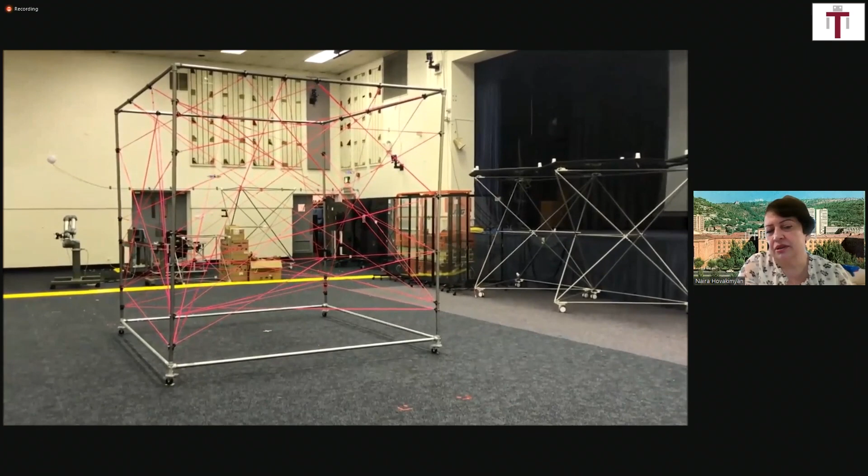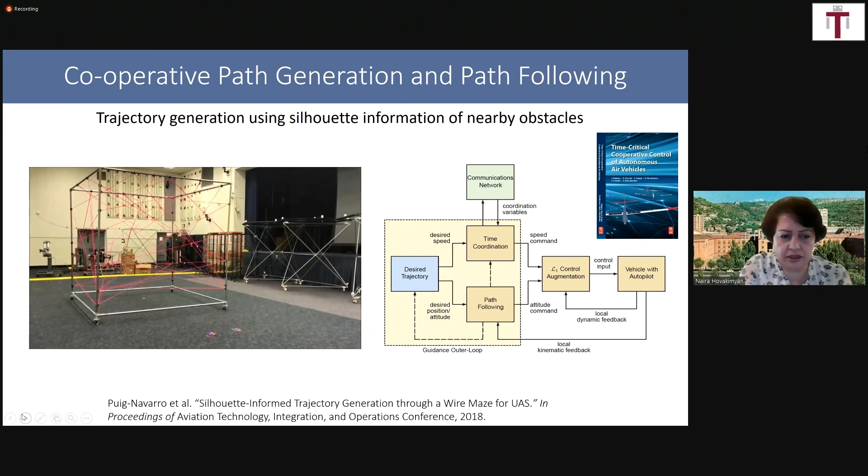So as a next step, we plan to bring this control contraction metric augmentation approach to this, to enable multi-vehicle missions in this type of constrained environments, to enable more agile collaborative missions.

And with that, I would like to acknowledge my current collaborators with very successful, interesting meetings all the time, my past PhD students and postdocs, all my collaborators, my current group, all the people at Air Force who enabled all these flight tests on the Learjet and F-16, and my student Arun Lakshmanan who compiled this presentation for me. Thank you all very much.

I'm happy to stop my slide share and go back to this mode. Happy to take any questions if you have. I don't know how I did with timing.

You can tell me. Oh, it's great. Yeah, thank you very much for your very interesting talk. I really loved how you gave a nice historical perspective on L1 adaptive control, and to see how such a control theoretical technique has been used very successfully in the context of safe learning and control. So that was really interesting and insightful.